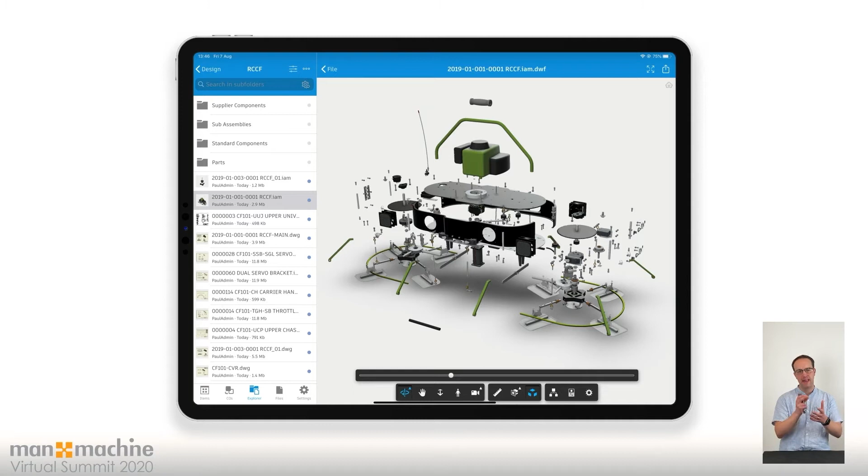The ability to see a model, section a model, even look at an explosion from a mobile device - that enables people not used to using 3D technology or driving an ordinary viewer to easily use iPad and touchscreen technology to zoom in, zoom out, navigate around, and interrogate that part, assembly or drawing with more detail if they want to.

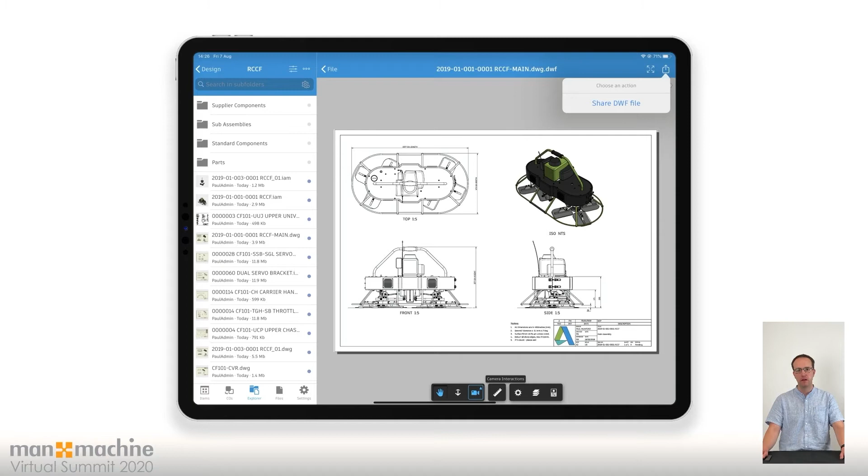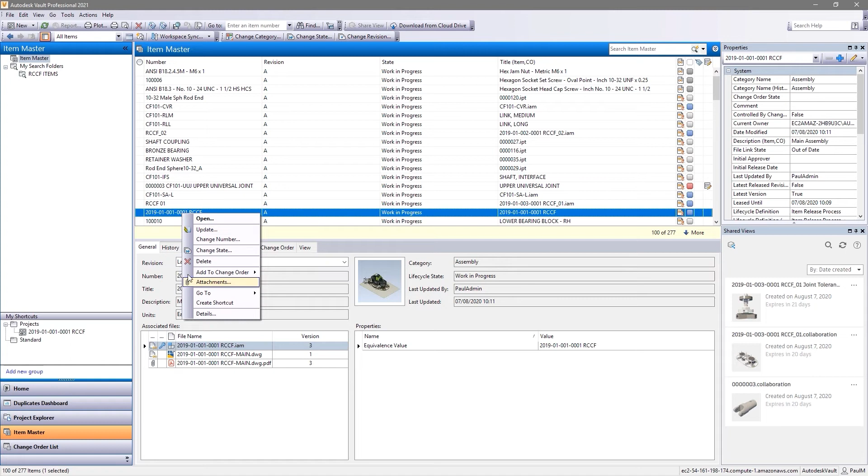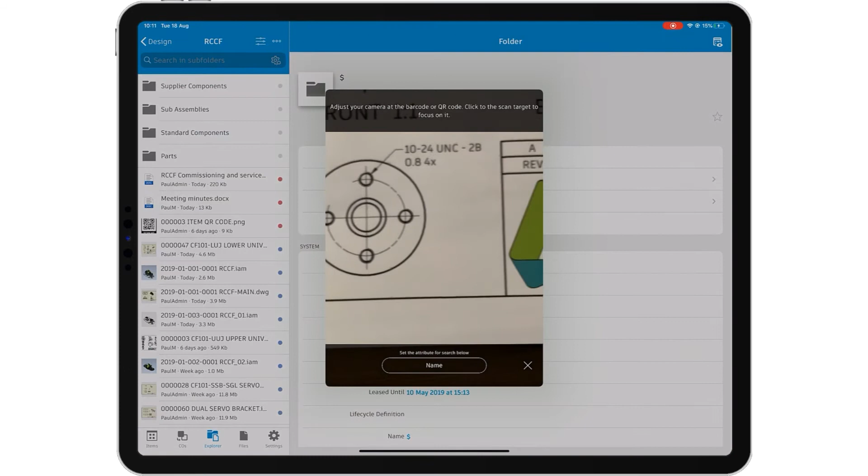Autodesk Vault makes it easy to manage your design and engineering data. Vault mobile app makes it easy for you to access and work with your Vault Professional data from your mobile device. For every document author in your company, there are many document consumers who need to access your vaulted data, and they may not have a dedicated workstation to access it. So what could be easier than accessing Vault from your mobile device? The Vault mobile app means you don't need to go to your data - it will come to you. Search and navigate the Vault, or use a QR code to associate vaulted data with drawings or equipment in the real world. View 2D and 3D files, measure components, and find associated documentation all from your mobile device. Whether working on the shop floor or job site, bring your data with you with the Autodesk Vault mobile app.

Thank you, Rob. It's good to be here. My name is Chris England, I'm a technical expert here at Man & Machine. Seeing the Vault app in a video, I've also seen it live - it's great. It's great to finally have the flexibility of a Vault application that can be on a mobile device.

Things like scanning QR codes and being able to check things in and out, or not check them in and out, but certainly review them on the fly and create or push life cycles when we're on the road. Some managers or people that need to do checks can't always access a computer, and this can certainly get the design process moving a lot quicker and more efficiently.

I'm going to be discussing Vault today. We're going to be looking at and reviewing Vault from the point of view of people that are looking at it for the first time, so you can get a better idea of how it looks. But also for people that have been using Vault for a long time, I'm going to show some of the advanced features and customizations within Vault workflows that can help automate certain features within our business, or help with things we do daily that we don't realize add up to a lot of time.

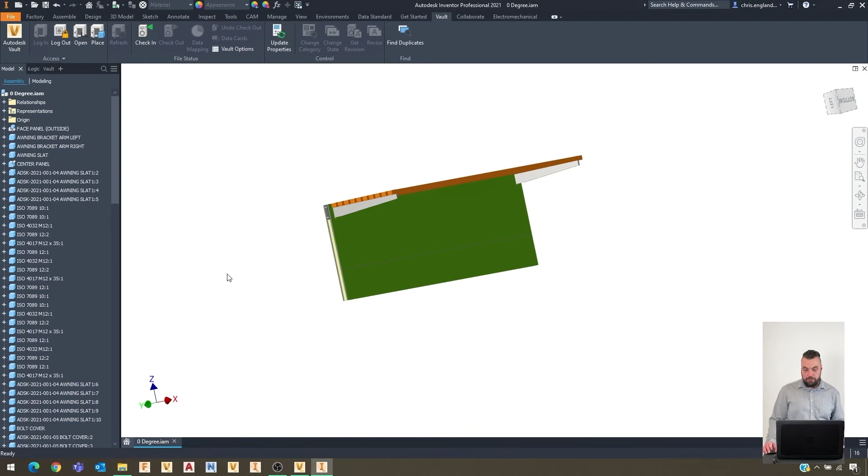I'm going to go to Inventor now and show a bit of a workflow on the awning part that Rob showed us earlier, which I'll be demoing a bit later when we look into VRED.

Looking at this part, I want to check it into Vault. Now most of my parts are already in Vault, but I can see that 2 of the files aren't. One of the newer functions we have within Vault is to find duplicates. We can either right-click on a file and say find duplicates, or just click find duplicates up here. It allows us to select a file or geometry, so we can actually select it in the window as well.

We can search for duplicate geometry in our Vault. This has a twofold function: one will let us search for geometry, or based on geometry, so it'll look at the actual geometry of the file, and if something else matches it exactly, it'll pick it up as a duplicate. It also looks for naming conventions.

You can see that my Vault's not very well managed, but I've got multiple copies, and one of them is in my library. So I'm going to make sure that before I check this in, I replace all of those. It says 40 occurrences have been replaced. Then also this little bolt over here, I can do the same.

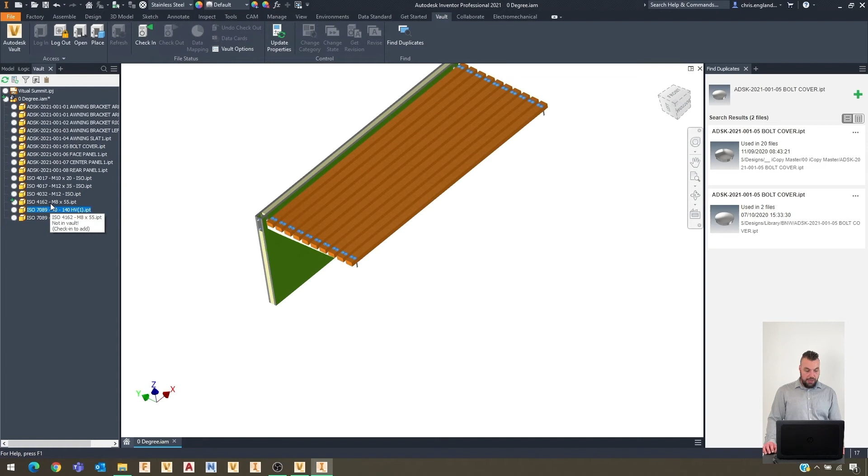So I can go and say find duplicates. Right click on it, find duplicates. Let me click away and click on it again. Let's see if I can get it right the third time. Third time lucky, funny how it works out.

Anyway, I'm going to then right click and replace all of those. And funny enough, I don't actually have any parts that need to be checked into my Vault, because those parts were already there.

This can be handy when we work with data sets from external suppliers that are perhaps compressed, or maybe we're sending a pack and go out and getting a pack and go back with edits or whatever it is. Obviously that pack and go contains all the files, but a lot of those files would be unchanged and already in your Vault, so you wouldn't necessarily want to check them in again and again. It can greatly increase our database size, but also reduces the helpfulness of any searches we do later. So I really like that feature.

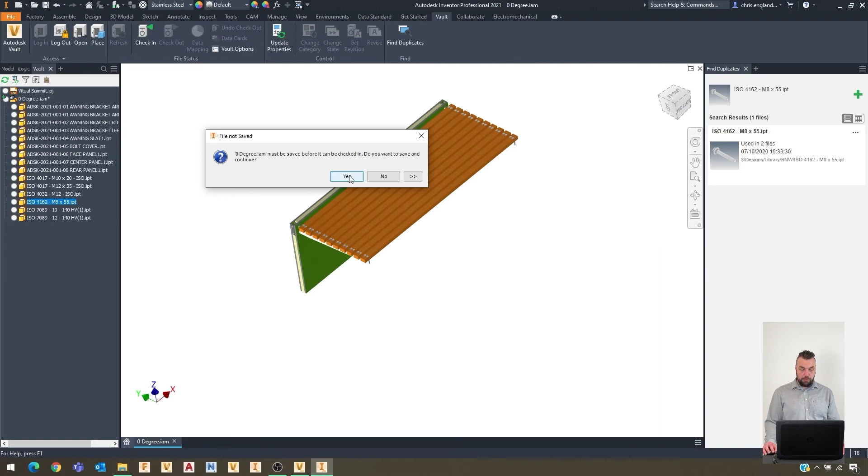I can now do the normal Vault tool, which I suppose most people would know Vault for: the check-in, check-out feature. I can now check this assembly in. Upon checking it in, we can see that I have options to delete the local files and work on it. So what check-in actually means, if you are unaware, is that when I check something out, I've booked it out to me to work on.

I've also done something else from a Vault point of view: we keep Vault on a server, and I'm working locally with that data, checking it out onto my local machine so I can work locally, which means we don't have to rely on network traffic when actually working on data within our Vault.

If I go and have a look for that folder... oh, where did I check it in? Perhaps it was this one. There we go, I can see that new assembly coming in. All the parts were already there, I will not lie to you, but the assembly is new, and what's happened is it's already been assigned a category.

Categories are a simple thing within Vault, generic to all the Vaults, but what can be important is what they can assign to things. Having a category like engineering or office data picks up certain rules, so it could be that the file extension contains an IPT, or

project name contains a certain field, then it must be this kind of project or category - electrical or mechanical projects if there's a certain code within the name. Or office documents, if it's an Excel, Word, or PDF document, it must be an Office document, and that can assign a lifecycle.

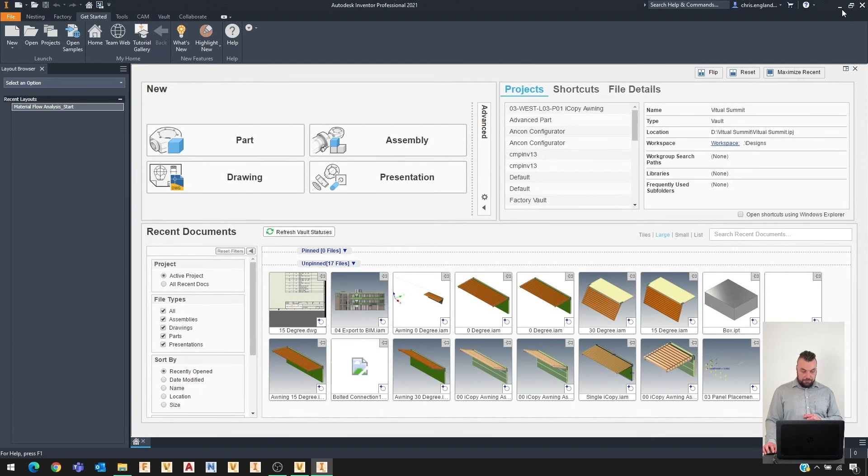So, moving on with my demonstration that crashed a second ago, but I'm going to play it cool. I'm going to open up this drawing and have a look at what it shows. Oh, looks like I'm getting another session of Inventor again.

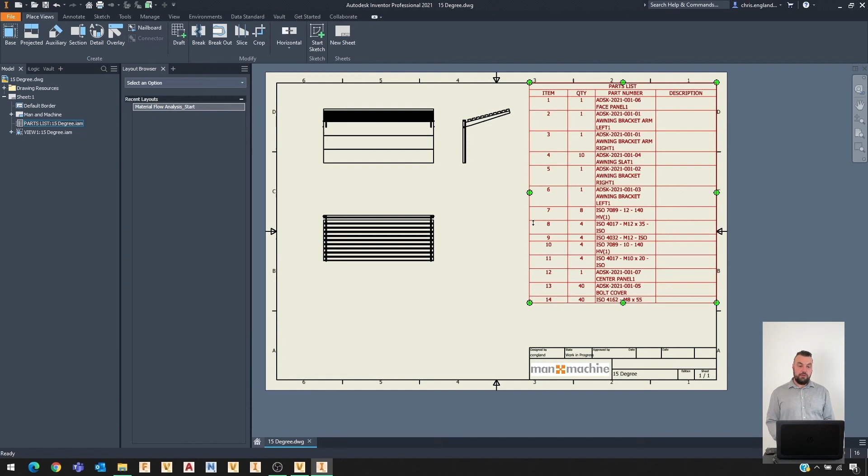So, when we look at things within a drawing or within any Inventor file, we can have certain processes that we need to keep up to date. For example, this state here is currently on work in progress.

I need to log into my Vault quickly again. And it's opened up a second session. Oh, not winning today, it seems. So, we'll log in.

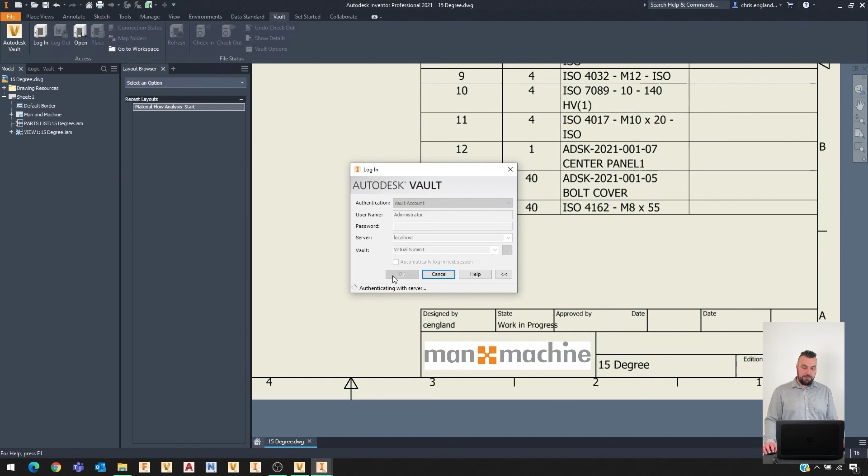And the state currently shows work in progress, whereas if I have a look in Vault, clearly it's released. Administrator's not supposed to see it locked, but that's okay.

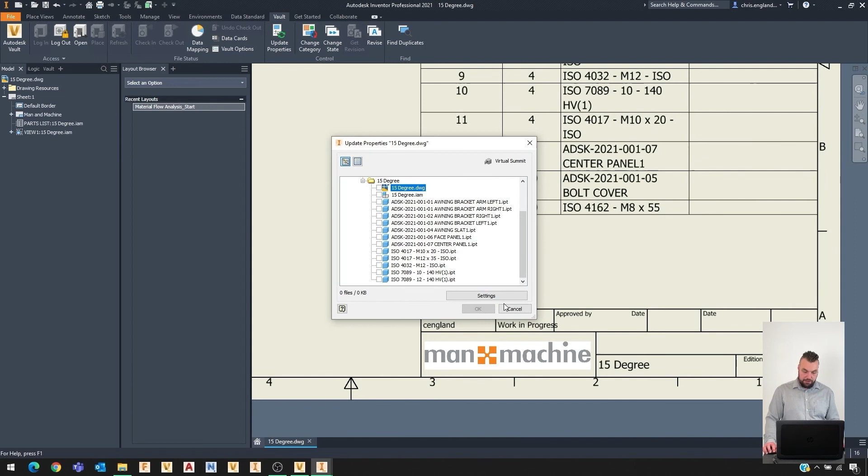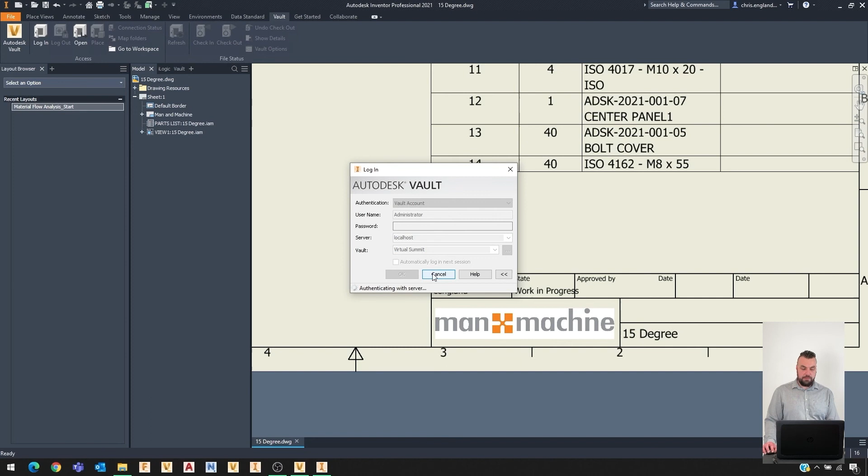So if I go and run an update, and let's just make sure I don't have two instances open. Still do. Need to log into my second one.